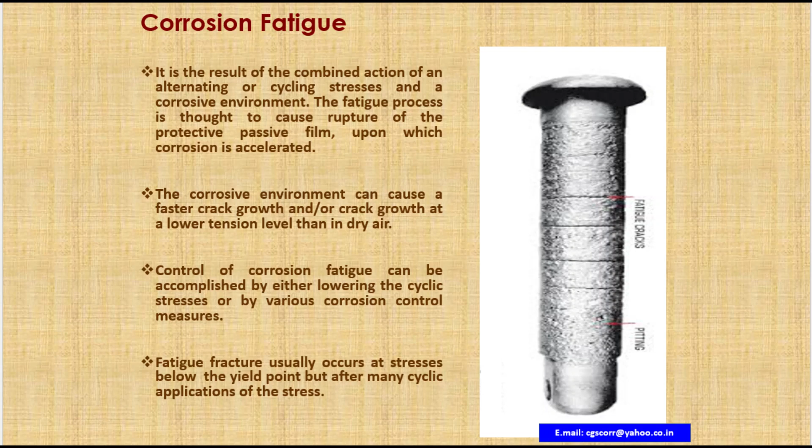Fatigue fracture usually occurs at stresses below the yield point, but after many cyclic applications of the stress. The figure on the right side shows you a number of fatigue cracks and pitting corrosion experience.

Prevention of corrosion fatigue. Change design so as to reduce stress or cycling. Reduce stress by heat treatment for residual stress. Shot peening to change surface residual stresses into compressive. Use corrosion inhibitors with care.

Use electrodeposited coatings of zinc, chromium, nickel and copper. Nitrided layers, that is heating of steels in contact with nitrogen-containing material, for example ammonia, sodium cyanide, etc.

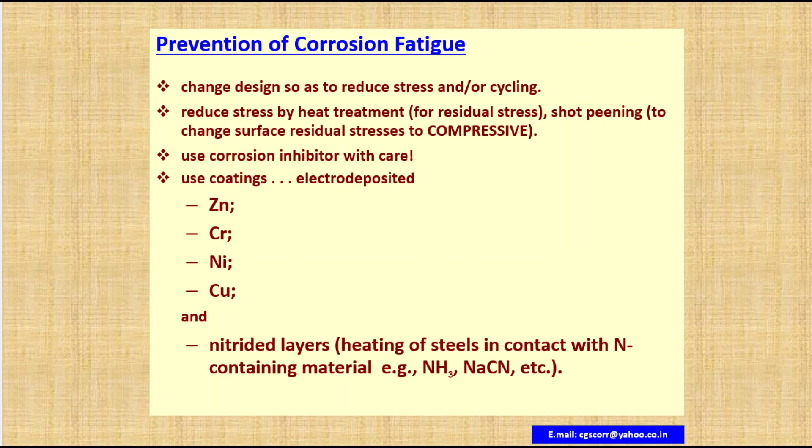Now we are going to deal with a mid-air accident of an aircraft, Aloha Airlines Flight 243, Boeing 737-200, which happened on April 28, 1988 at Honolulu. Actually, the failure analysis report contains more than about 10,000 pages. For the listener's convenience, I have reduced it into only 16 slides.

April 28, 1988. Flight 243 was scheduled for several island hopping flights. The first officer conducted the pre-flight inspection in darkness and noted nothing unusual. The airplane initially flew 3 round-trip flights from Honolulu to Hilo, Maui and Kauai. All flights were uneventful. There was no requirement for visual inspection between flights, and none were conducted.

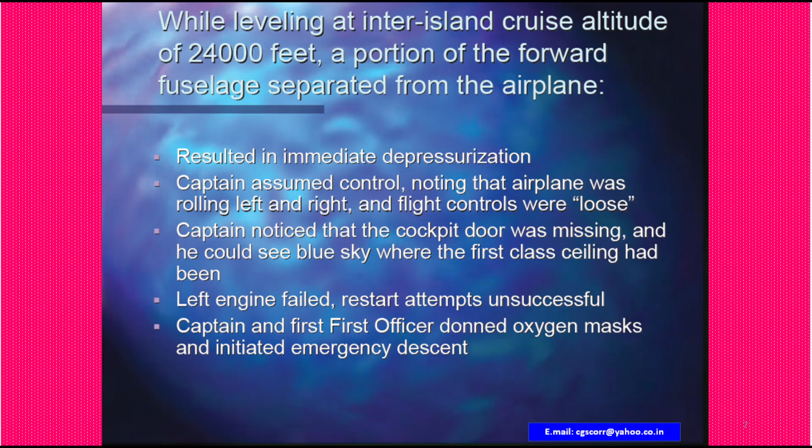The captain and first officer donned oxygen masks and initiated an emergency descent. Successful landing in Maui. The separated section extended from the cabin floor, equivalent to 1/4 of the fuselage length. One fatality, 7 serious injuries.

The fatality was a flight attendant who had been standing at row 5 and was swept out of the cabin. A flight attendant at row 15 was thrown to the floor and slightly injured. The flight attendant at row 2 sustained serious injuries from flying debris. When depressurization occurred, all passengers were in their seats and the seatbelt sign was already illuminated.

Damage summary. At the time of the accident, the airplane had 89,680 flight cycles and 35,496 flight hours. After the accident, a passenger reported that as she boarded, she noticed a large vertical fuselage crack but did not mention it to anybody.

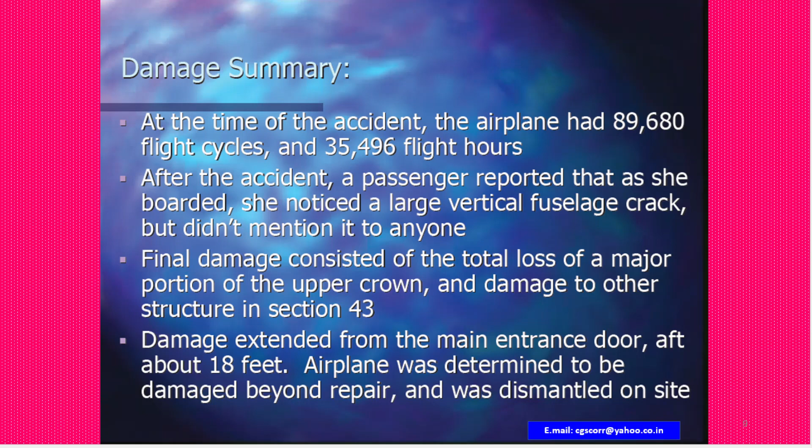Final damage consisted of the total loss of a major portion of the upper crown and damage to other structure in section 43. Damage extended from the main entrance door aft about 18 feet. The meaning of aft is near, toward, or the tail of an aircraft. The airplane was determined to be damaged beyond repair and was dismantled on site.

Accident was caused by pressurization-related cyclic fatigue of fuselage lap joint. Disbonding of joint led to improper load distribution and fatigue cracking. Joint disbonding also led to corrosion, which contributed to joint failure.

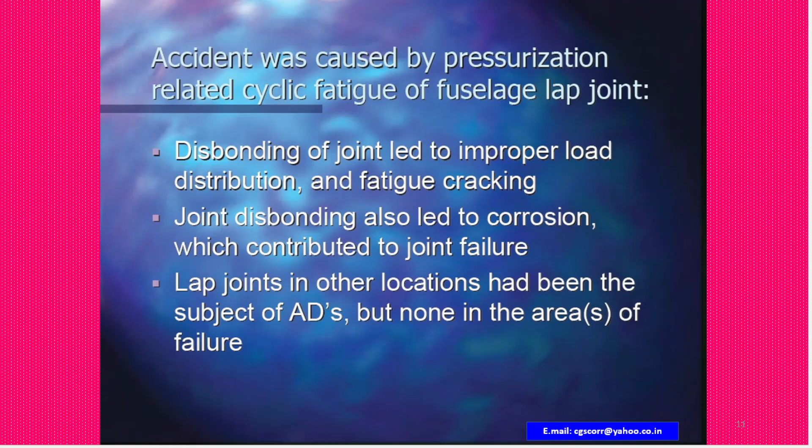Lap joints in other locations had been the subject of ADs, that is Airworthiness Directives. That is a document issued, adopted by the agency which mandates actions to be performed on an aircraft to restore an acceptable level of safety when evidence shows that the safety level of this aircraft may otherwise be compromised. So, the lap joints in other locations had been the subject of Airworthiness Directives, but none in the areas of failure.

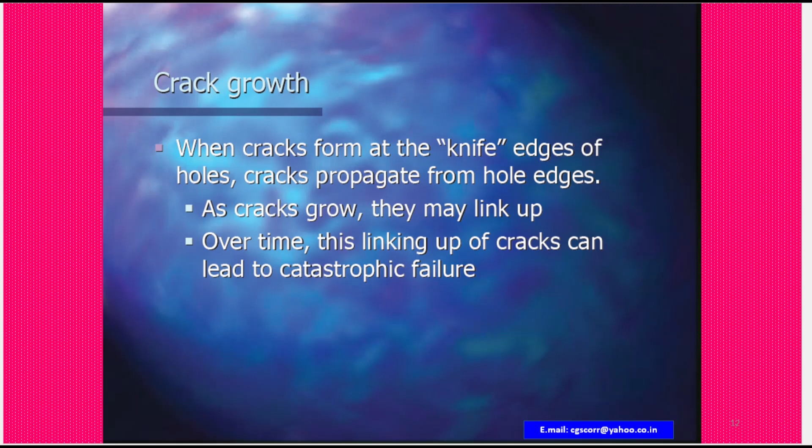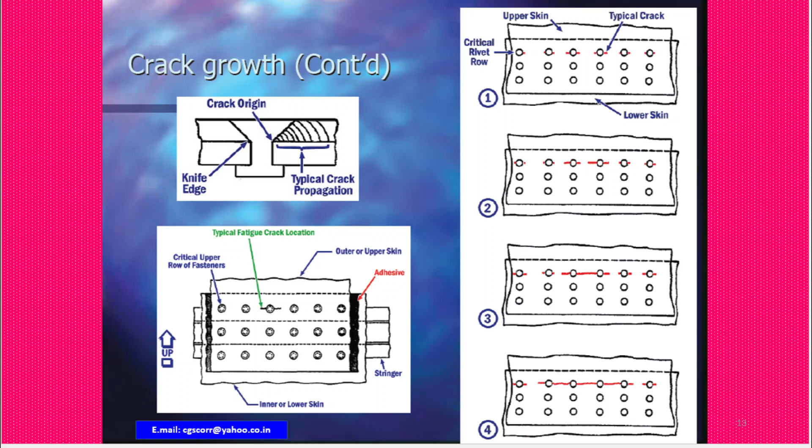You can see the critical upper row of fasteners, outer or upper skin, adhesive on both sides, and inner or lower skin, stringer. You can see the fatigue crack location on the upper row of fasteners. The figure on the right side, 1, 2, 3, 4, depicts clearly how the crack propagates and links up, which leads to catastrophic failure. Upper skin typical crack, critical rivet row, then it extends, it propagates. Figures 2, 3 and 4 show it propagates and links up and finally leads to catastrophic failure.